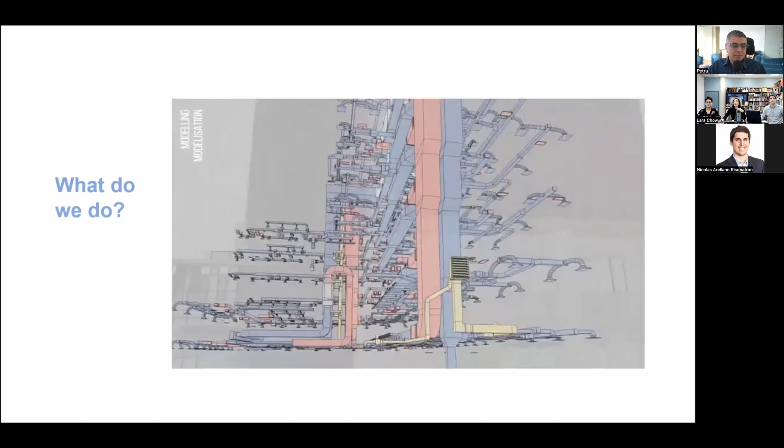So what do we do? We have 4 areas of research. Our first stream is digitization, which is the translation of the real world into XYZ coordinates through reality capture methods such as terrestrial laser scanning and photogrammetry. Next, we have modeling, where we take that metric information captured through digitization and translate it into geometry, such as existing conditions models for BIM.

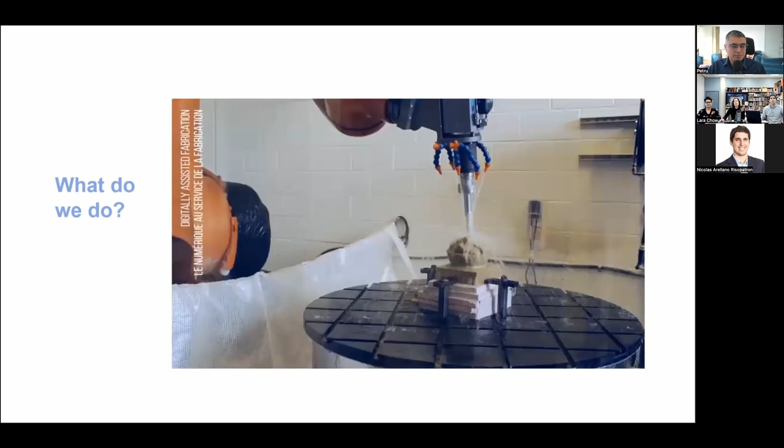In digitally assisted fabrication, our research aims to develop a process that augments traditional craft workflows with digital technologies. And finally, our digitally assisted storytelling research looks at creating things like web applications, AR and VR experiences to create engaging narratives for public dissemination.

And finally, a 5th stream that you don't see here, but we're going to talk about today, is emerging in our research: digital twins. Digital twin technology can provide information to improve design, construction, operation, and management of a building or a system of buildings. We really believe that it's a design tool that can augment the way we make decisions.

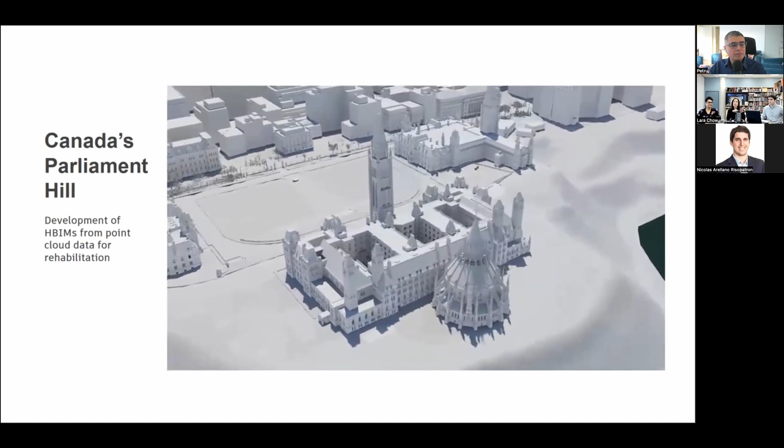So I'm going to give you a brief background on our journey that brought us to digital twin work by showcasing a couple of our projects. When our current director, Stephen Fai, took over the lab in 2007, he really saw this opportunity to research heritage building information modeling - essentially developing HBIM from point cloud data.

Once we showed the value of this to Public Works and Procurement Canada, they asked us to develop an existing conditions model of Parliament Hill. The Center Block BIM is actually currently being used for the rehabilitation project right now.

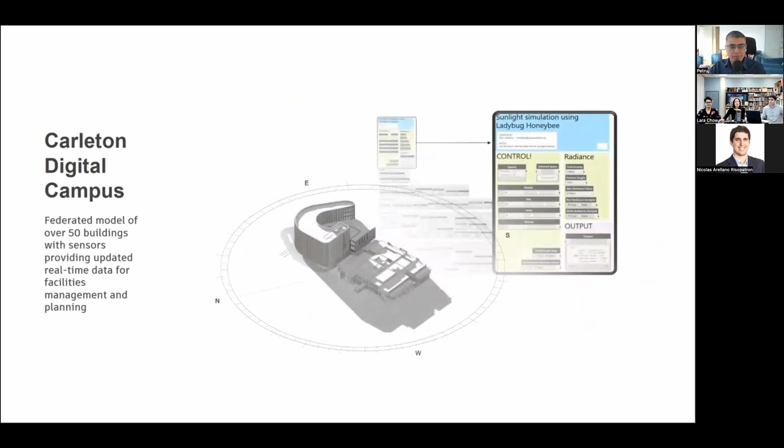Leaning into our BIM experience and learning from it, we also developed an asset information model of the Carleton University campus. This could be used as a facilities management tool to analyze existing conditions and explore future management and planning decisions. This contains over 50 detailed building information models of new and existing buildings and future constructions.

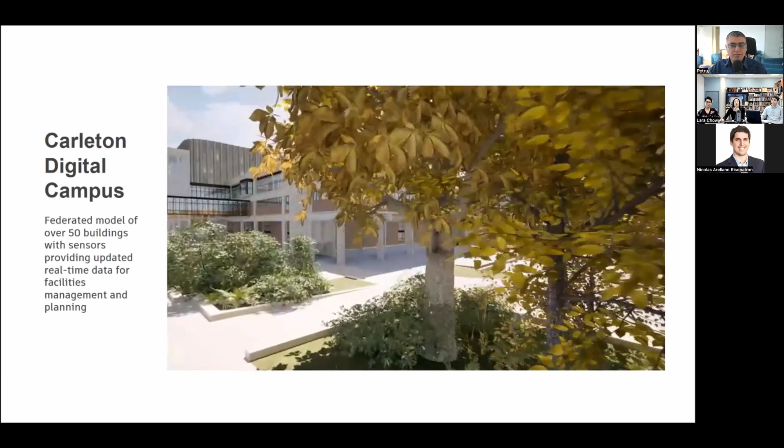At this point in our research, we started to link facilities management data to show building performance in almost real time - looking at things like electricity consumption, parking, building occupancy. Right now we're currently working to integrate more real-time data by working with the facilities management and operations team here at Carleton.

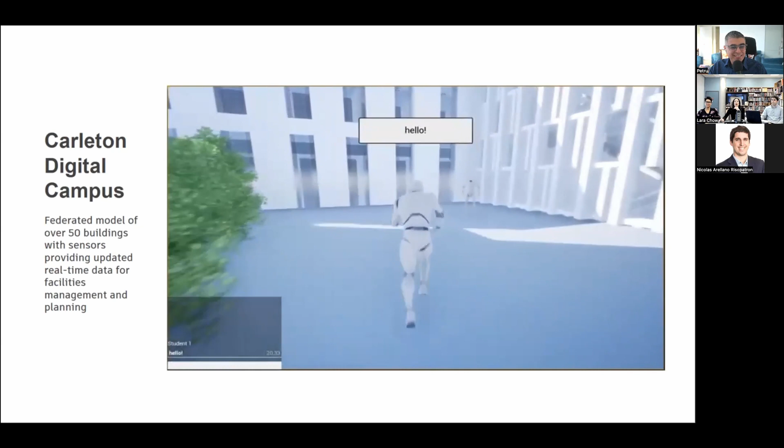Also, this was used for public outreach and engagement, for a virtual tour for some of the students that couldn't actually visit the campus during the pandemic.

Wow, that was really cool. Yeah, it was a great project to work on, and it's had so many different uses. That's really just showing, once you have a model, you can do so many different uses with it, and there's a lot of value to it.

Yes. Yeah, and then finally moving on to one of our larger scale projects, we developed a city asset information model for the National Capital Region here in Ottawa. Basically what we did was consolidate a variety of data into this single application to be accessed by urban planners, architects, and the National Capital Commission staff.

This involved modeling the NCC's asset library, including monuments, sites, street furniture, but then integrating it into this base model that we developed from GIS data, as well as the topography and the built environment. So now I'll hand it over to Julie, who will talk a little bit about the digital twin project.

Thanks, Lara. So a couple of years ago, our work brought us to a new question. What could a national digital twin of Canada be? For those who aren't familiar with the term digital twin, it's a system that has three parts. It's a physical thing in real space, such as the building we're in now, the digital version of that thing in virtual space, so a BIM of this building, and synchronized data connections between the two, updating the digital model to reflect its current state.

Now, ideally, data would be updated automatically using sensors or IoT to show what's happening in real time. We're still working on that part of it. But what's amazing about digital twins is that they bring together all types of information into one place. So we can see the entire system and its context and effects on other things. We can then use this information to help us make decisions on how to improve building performance or change the way we design cities and test those scenarios and identify areas that need help.

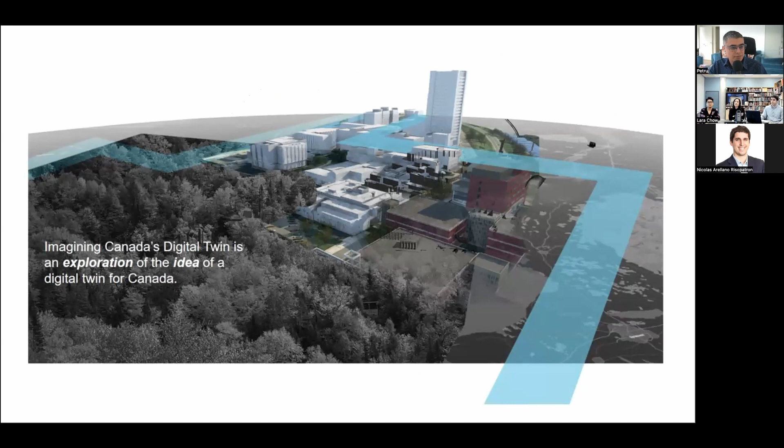Now, many cities are already working on digital representations of their urban environments and publishing open data. What is missing is a structure that could bring all of these urban representations together. But what about the places in between these urban centers? And what about infrastructure that connects all of us, such as networks like electricity, transportation, and communications technology?

So in March of 2020, we were fortunate to receive funding from the New Frontiers in Research Fund to develop this question further. This is a government funding program that supports high-risk, high-reward research. Our project, Imagining Canada's Digital Twin, which is ICDT, is the exploration of the idea of a digital twin of Canada. For our research, we have two objectives: to build a research consortium of academic, Indigenous, not-for-profit, public,

and private partners that represent local and regional networks, and also to develop a prototype of the Montreal and Ottawa-Toronto corridor. We will use what we've gathered from these 3 years to apply for the next phase of funding, which is the transformation grant, which will provide funding for up to 7 years, and where we will continue exploring a digital twin of Canada at a national scale and beyond the AECO.

ICDT is the first national initiative to address the opportunities, challenges, and responsibilities involved in developing a digital twin at a national scale for Canada. And we believe that ICDT is an opportunity to develop a leadership role for the AECO for Canada in the integration of innovative digital technologies. Our goal is not to resolve the question of a digital twin for Canada, but to determine its feasibility and the level of effort required to see it realized, and to establish a national group to move forward in this realization. If I may jump in, I have two quick questions.

Is this only for buildings? In the first phase of the grant, we're looking at the AECO specifically, but when we apply for the next phase, we want to go beyond architecture and building. We want to look at all different disciplines and see what else we can integrate at the national scale. I was thinking more about if it's only buildings or also infrastructure, like roads and so on, if this is also part of the project.

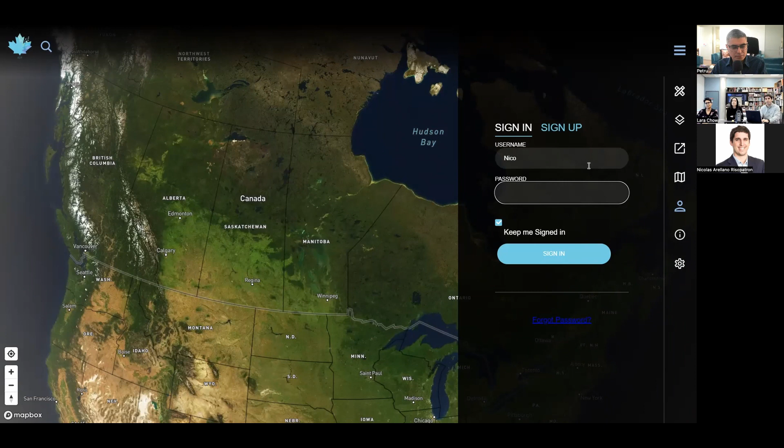Of course, this is just a prototype and some early features, but for example, we are developing this authentication system where people can sign up, log in with their credentials and get specific content depending on who they are, which group they belong to. And then when you are in, you can start navigating the platform. I'm going to show you this in a second.

But some of the technologies that I wanted to mention: we started building this with the languages of all modern web browsers, which are JavaScript, CSS, and HTML. And also we are incorporating some of the libraries that I was mentioning, Mapbox and the OpenStreetMap layers, Three.js for the 3D graphics, IFC.js for BIM. And also we are working on implementing some more professional, maintainable front-end frameworks such as TypeScript and React.

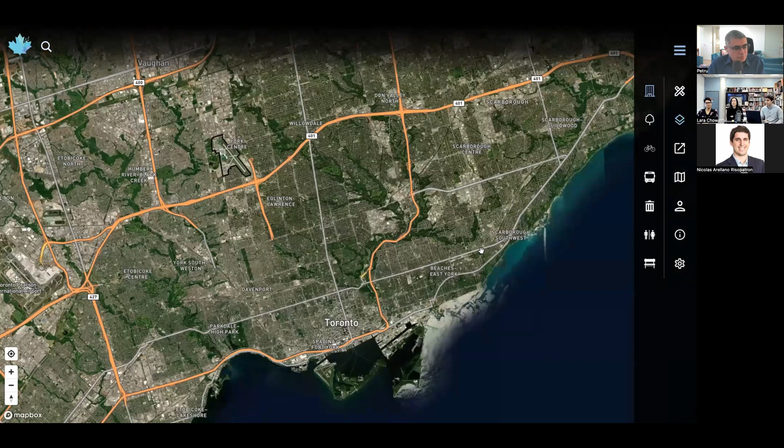So yeah, we use this geocoder to navigate Canada. So I'm going to show you, for example, if I go to Toronto, we are going to be able to access some of the layers that Open Toronto has on their website. For example, you can access the position and some of the data of all of the bus stops in the Open Toronto datasets, where the garbage cans are, bicycle parkings, etc.

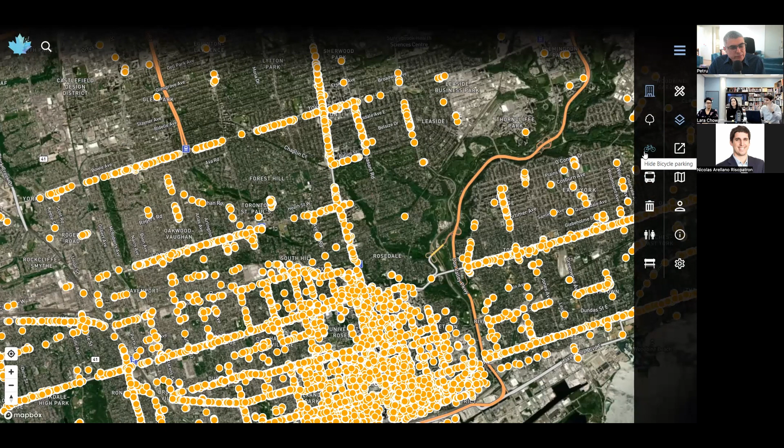So this is one of our ways of taking data that is on these sites, just posted as JSON, GeoJSON, formats that are really hard for non-developers to use, to make it accessible and also to make it part of the context for your digital twin work. Also, we have incorporated, as I was mentioning, layers from OpenStreetMap. So here you can see that we have the extrusion of the buildings in rural and urban areas.

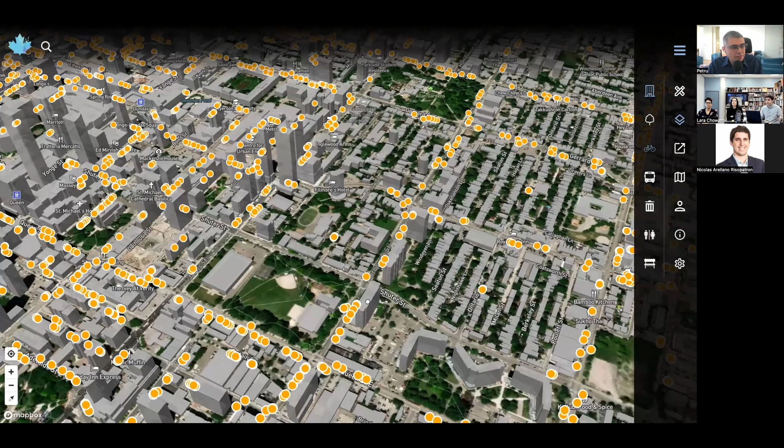And besides having integrated these layers from libraries or from packages online, we are finding ways of incorporating data from the client, from the user. So here, for example, directly from the front end, I'm going to generate a new area. So I'm going to call this Park 1, doesn't matter. And then here, I can start uploading my models directly.

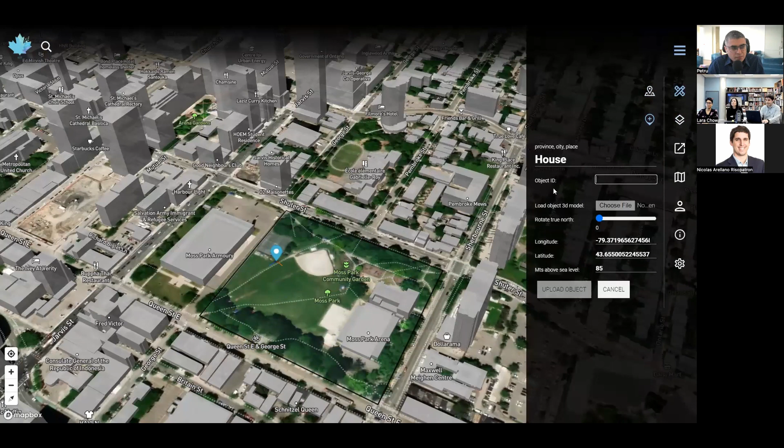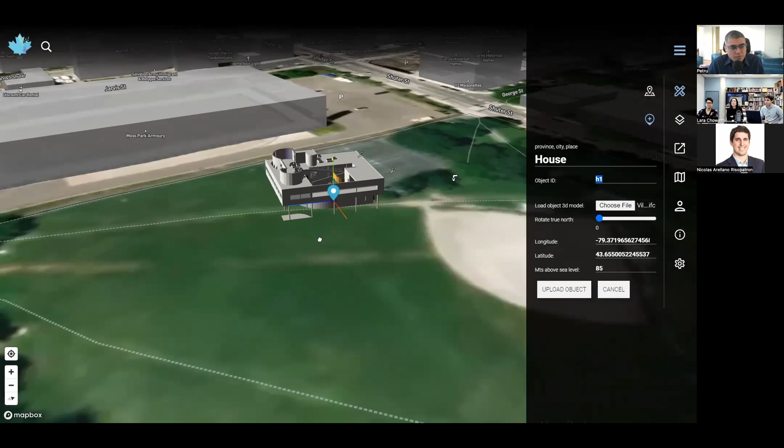So here, for example, I'm going to select the position, and then you can start putting the IFC or GLTF or whatever file that you need to upload there. So yeah, I'm just going to use this model here. You can place it, you can move it around, and this is going to become part of the database, basically.

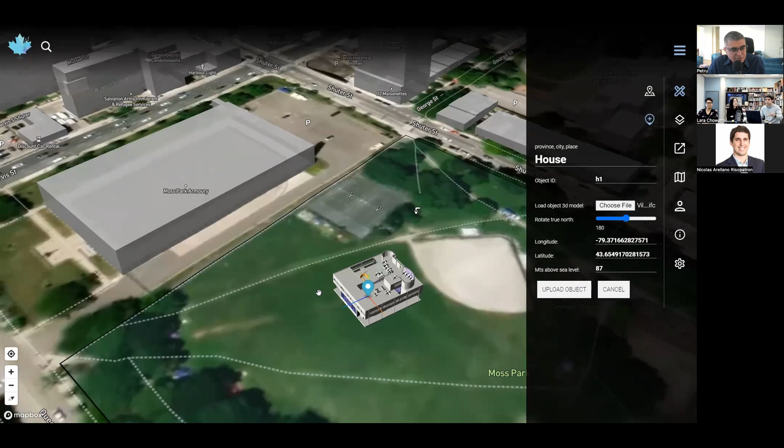Yeah, so that's pretty much the way we are asking the user to upload data. And I'm going to show you in one of the cities that we have added data from our SimsLab projects. So in Ottawa, which is our city, we're going to show you the project that Lara mentioned earlier, which is the Carleton Digital Campus. Sorry, I have the Zoom user interface here.

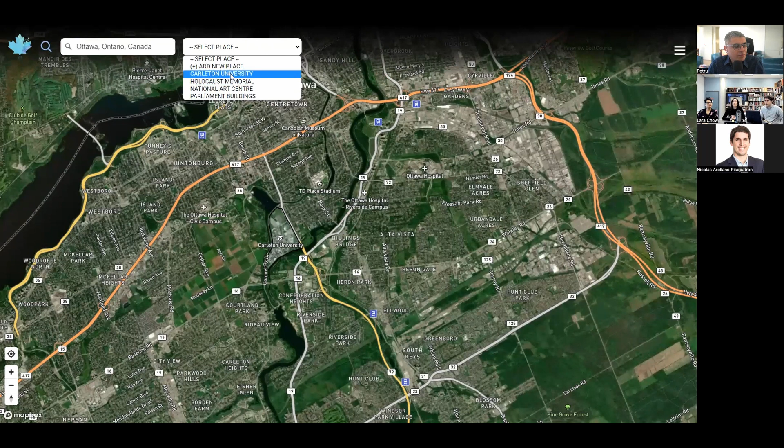So here, as Lara was mentioning, this is more than 50 buildings in our university campus. So 4 gigabytes of IFCs, and you can see that all of the buildings load pretty fast. It takes a couple of seconds to have all of them loaded directly on the context. And you can access each of them. And also, as I was mentioning earlier, you can integrate some other layers from the internet to have them as context. So here you can just go and access any of the 50 buildings that have been placed.

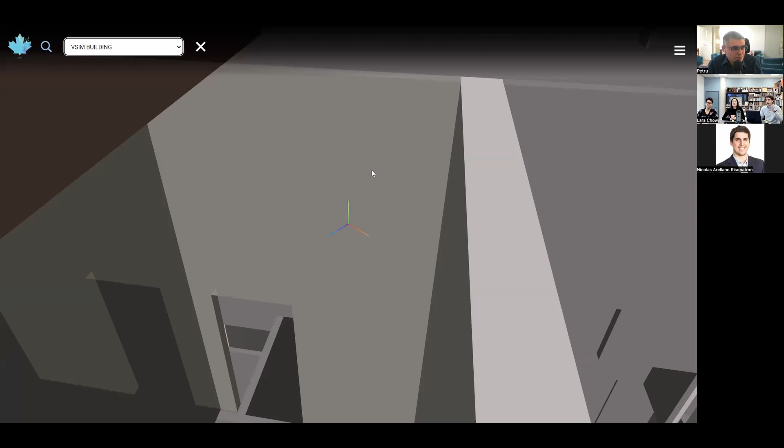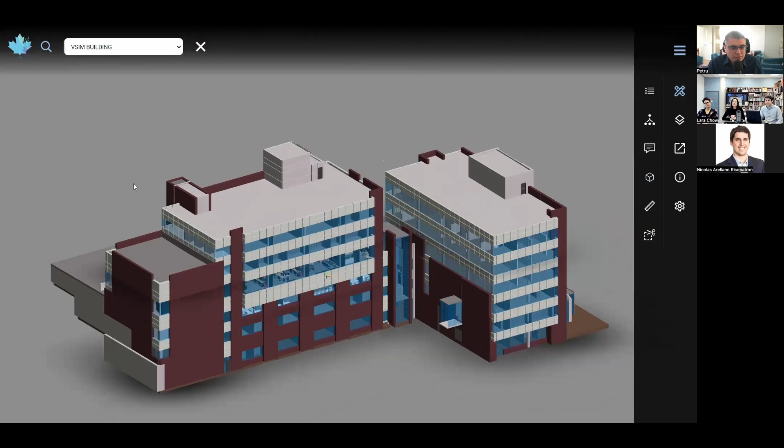And for example, I'm going to show you the building that we are in right now, which is the VSIM building. And here we are opening an isolated view that we call the BIM viewer. And here we are using some of the tools that we are getting from the IFC.js library, for example, to change the projection from perspective to orthographic, so that way we can generate elevation, plan, etc. Then we can also go inside the building with cut planes.

And for example, we're going to show you where we are right now in this table here. We can use this model directly in the browser. And there are some features that we have been developing. For example, you can measure things directly there on top of the digital assets. You can type messages. So for example, here in this table, I'm going to say, we are here, etc. So this could be kind of like a communication platform also.

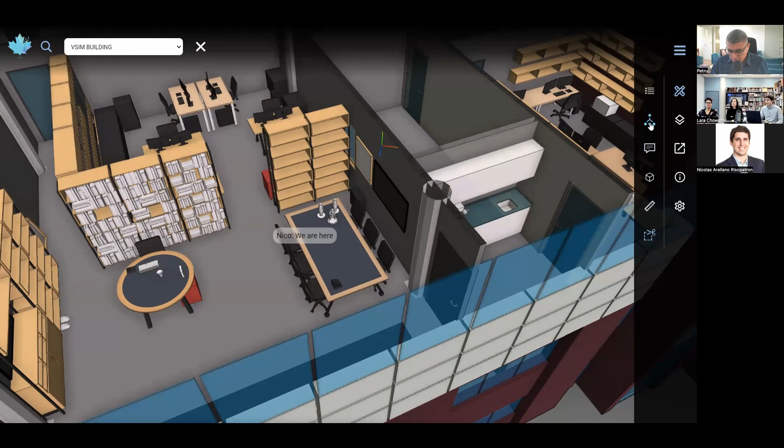Who can read that message? Eventually, the users will be able to, because they log in, so they will be able to add notes or measure things directly on the spot. And finally, because this is BIM, you can access the metadata of all of the objects. Here are some of the property sets, and also the IFC tree. So this way you can see the entire IFC model with all of its components directly here in the browser. So that's pretty much what we have so far.

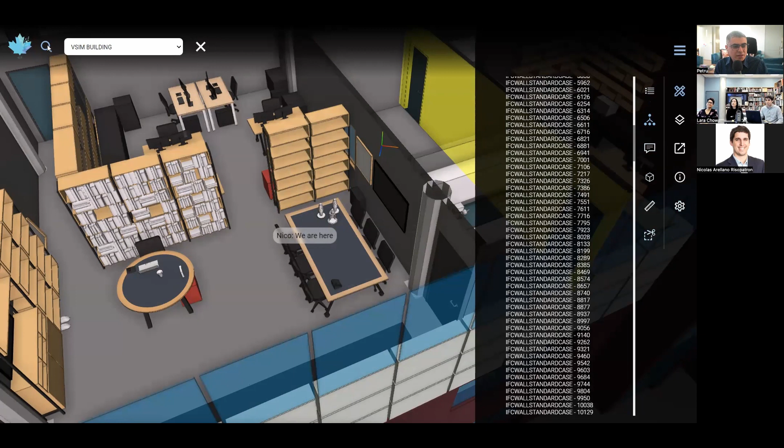And because we are building this with the roadmap that I was mentioning, we are trying to develop new tools, for example, to integrate dynamic data coming from real-time data sets. Also, we are trying to incorporate some kind of verification of models. So if somebody uploads a model, there could be an organization or someone curating the data, making sure that it's accurate, making sure that it's appropriate. And finally, also trying to add phasing. So you can have a model in different phases in time to see how it was in construction, or maybe design development, etc., and slide through the different phases.

Well, I think part of this is just making sure that the features that we have are stable and putting it through testing and understanding if there are bugs. And we really want to push the limits of the platform and figure out exactly what file types we can support, what kind of geolocation we can support. Also doing some more collaboration features, so being able to share views. So if you have a portfolio of buildings and you want to share a view of a building with a client, then you can share the exact camera location.

As Nico mentioned, you can also do some sharing of comments. So if you're walking through a building and saw that something needed repair, you could leave a message on something saying, hey, check this out, I think this needs a repair. Someone can open it up on an iPad, go check it out. So just features like that.

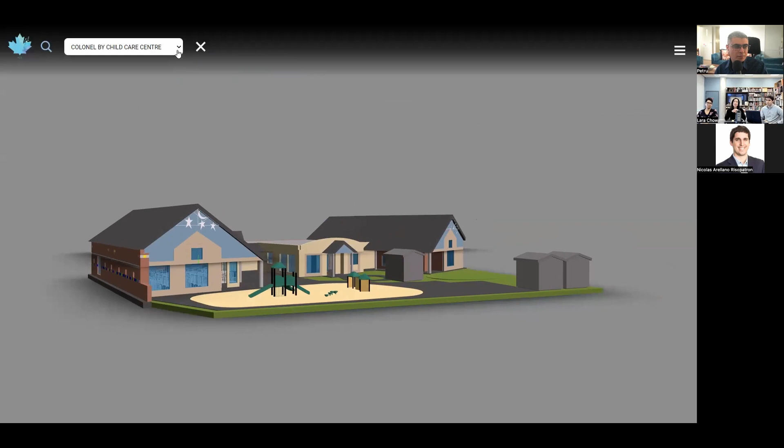And one that's really important to us is obviously being able to access open data and making it accessible to people. So we're also looking at integrating things like zoning parcels, land use, but doing that automatically. So it actually calls these databases through an API, and then we automatically get the data as it's updated by whoever's providing it. So yeah, I think that's everything that we're currently working on. But if anyone has any ideas for features or uses, we'd be happy to hear them.

Is it only you three working on this project, or are there other people involved as well? No, there's more than just us. We have a couple of developers working on it as well, and someone working on the UI/UX, but it is a fairly small team.

I think there's about 7 of us. And the thing too is we're primarily architects and engineers, not developers. So obviously it's maybe a little bit slower than if we were a software company, but yeah.

You are using all these open source tools, right? But that does not mean that this project will be like a repository on GitHub, right? So, well, what we're hoping to, once we test some bugs out, we're thinking of actually making it open. So cool. Yeah, we're working towards it, right? So something to look for in the future.

That's interesting, because if you do that, then that might become a global digital twin, if there is interest and involvement. Petru, as we were mentioning, we started learning about the open source communities a few years ago, and this is all new for us, but we like what they do. We like the community that they generate. We have seen different examples of digital twins in other countries, and what we want to propose as a novel thing is, how can we make this like an open source library that the community can participate in?